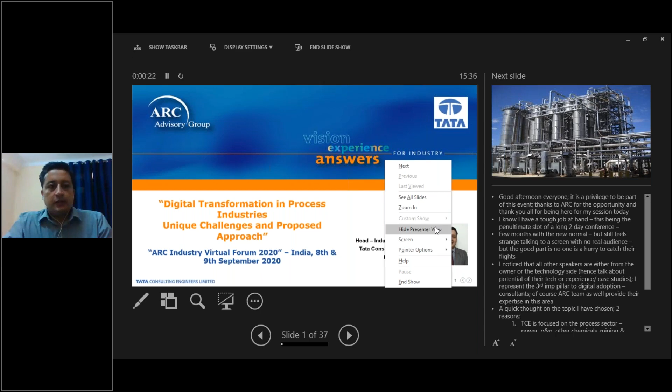I know I have a slightly tough ask, this being the penultimate session of a long 2-day conference, and I'll try my best to make it interesting and request for your patience.

One of the things I noted was that all the other speakers here, apart from the gentleman from ARC, were either from the owner side or from the technology firm, which makes a lot of sense. Owners are going through the digital transformation journey, and technology firms are providing them the tools to reach there. But I believe I represent the third key pillar in this digital transformation, which is the consulting side of it, and I think they have a very strong role to play. Happy to represent that pillar, and of course the ARC team also provides their valuable expertise in this area.

A quick thought on why I have chosen this particular topic. The first reason is simple: TCE does a lot of work in the process domain. We do a lot of work for power plants, oil and gas, petrochemicals, downstream and other chemicals, for metals and mining. We also work in the infrastructure domain, but the bulk of our work is in the process industries, so we have a good understanding of what happens there.

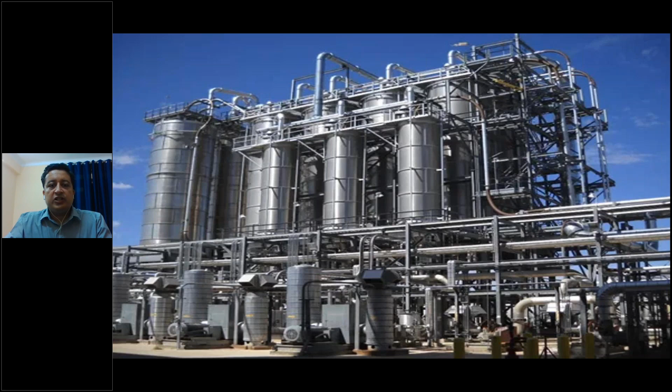With that, let's look at some of these unique aspects, which I've tried to list based on my understanding and discussions both within and outside our organization. The first thing I feel is very unique about a process industry or process plant is the immense complexity. There are diverse equipment, control schemes, operating procedures, so many PFDs and P&IDs coming together, and complex instrumentation.

A process plant with medium complexity may have as many as 50 P&IDs that coexist together. Some plants with more complexity may have as many as 150 to 200 such P&IDs, all interlinked, which come together. And to understand them, of course, needs a lot of context, as I spoke earlier.

The other thing which is key is that most of these process plants are bespoke. They are unique, in terms of maybe some of the components being common, but when it comes to the entire configuration, they are unique, and very few two process plants will have a similar set of equipment or similar configuration. So that's one of the key things I believe is unique about this process industry.

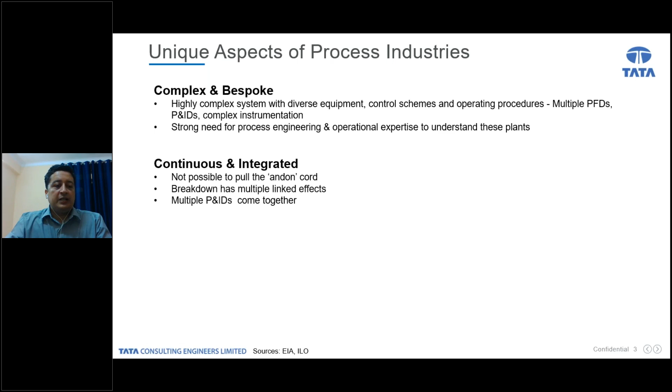But here there are multiple effects, not just in terms of inventory getting wasted, but also related effects on the asset health of the different components. Because the plant is integrated and all these P&IDs are interlinked, stopping the plant can lead to changes in process parameters, which could have a damaging effect on the equipment and the plant altogether, affecting asset life as well.

The third key area is energy intensity. According to EIA estimates, the industrial sector overall accounts for around 54% of the world's total energy consumption. But when it comes to process industry, I was surprised to note that 75% of that comes from process industry, excluding discrete manufacturing, logistics, and other industries producing an equal GDP amount. Process industries are unique in their extremely high energy intensity, and I want to bring in an example of aluminium smelter.

For one of our clients, we were doing a study related to aluminium smelters. During the aluminium smelting process, in the pot line, the amount of energy consumption is immense, and that is one of the main cost drivers in the production cost of aluminium. So that's the level of energy that is spent.

There's a related point when you talk about energy. Similar to energy, when you talk about water consumption, or emissions that are released, the same principle applies - they are very intensive in water consumption, other resources, and emissions. That's one characteristic separating process industries from discrete manufacturing or supply chain, which are relatively cleaner. Their energy costs are limited to the electricity required to run machines and overall plant lighting.

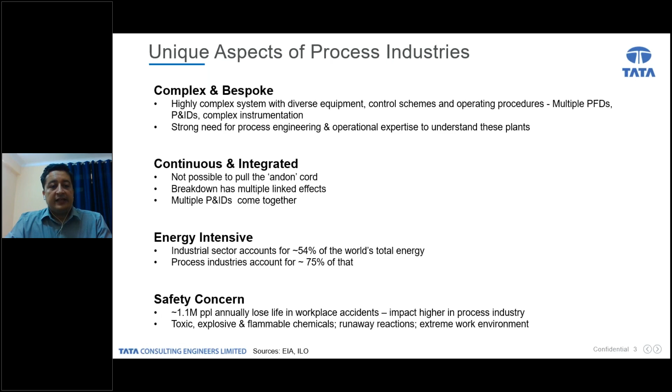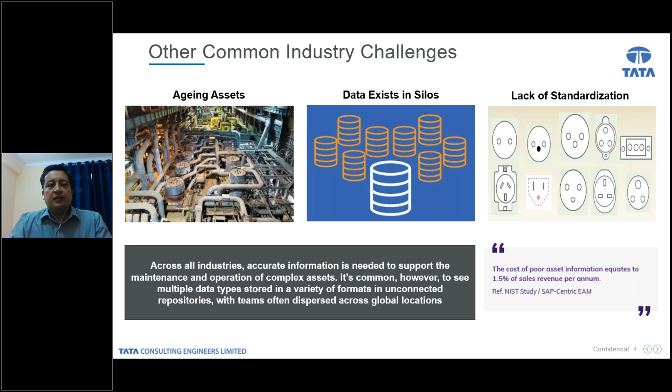So those were certain things more specific to the process industry. But apart from that, there are of course other industry challenges such as aging assets, a lot of data existing in silos, and lack of standardization. These are common across the industry, and I'm sure a lot of my earlier speakers must have spoken about this, so I'm not going to dwell too much on that. What I wanted to say is that these other industry challenges additionally apply here as well.

So having looked at the unique aspects or nature of process industry, let's now come to how this impacts digital transformation in the process sector.

So we spoke about these complex bespoke assets, and for bespoke assets you need bespoke solutions. I want to explain that by saying that even the imperatives right from the beginning, and I'm not even going into the details of the solutions required, but even the reasons why the solutions have to be implemented are unique in the process industry. In most other industries, the prime driver of any initiative, including digital, would be productivity. But in process industry, productivity is important, and driving shareholder returns is one of the top priorities, but along with that there are three other factors - reliability, safety, and energy efficiency - which are almost as important or sometimes even more important than productivity, given the nature of a particular business or the priorities of a particular client.

So I would like to briefly cover these three. Reliability - don't get me wrong, I'm not saying reliability is only used in process industry. We have umpteen examples of reliability being used in the discrete sector, and in fact the origin of reliability happens to be in aerospace, although there it was applied to the aircraft itself, not the aircraft manufacturing process. So that's the subtle distinction. In that sense, if you look at an aircraft, it is in a sense like a process plant - a very complex equipment operating in a very typical condition, where failure is not an option. Failure means so many people dying because of a plane crash.

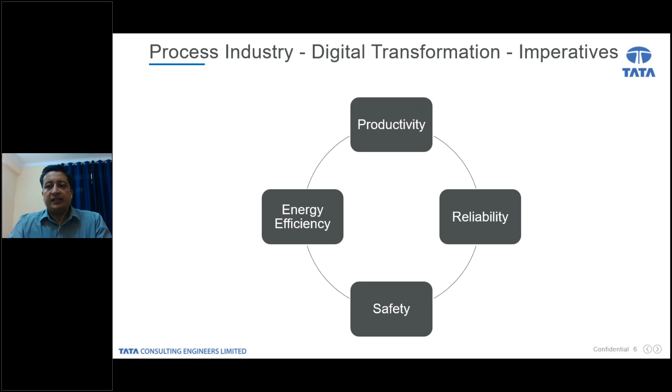So that's the way these solutions - because the imperatives themselves are unique - the design of these solutions has to be thought very differently. We cannot just take solutions implemented in other industries and implement them in an out-of-the-box manner. We need a structured process to conceptualize solutions tailor-made to the process industry and implement them.

Coming back to the impacts, the second key impact I want to talk about is the need for a comprehensive approach towards digital transformation in process industry. And there are two key points I want to drive here.

The first one is this whole concept of digitization and digitalization. I understand there are many ways in which it is used, and different people have different understanding. But broadly, what I believe is digitization is essentially just converting your information, which is probably currently in a physical form, into a digital form. This could be digital sensors, digital engineering, or any other documents or data available in a plant. So simply converting it into digital media is what digitization is.

And on the other end is digitalization, which is essentially using that digital information that is available in order to do multiple things - to create visualization, to use for productivity optimization, for asset performance management, or for digital workforce. Essentially, using that data in umpteen number of ways in order to get several benefits out of it. So any form of app development or solution development using that data is digitalization.

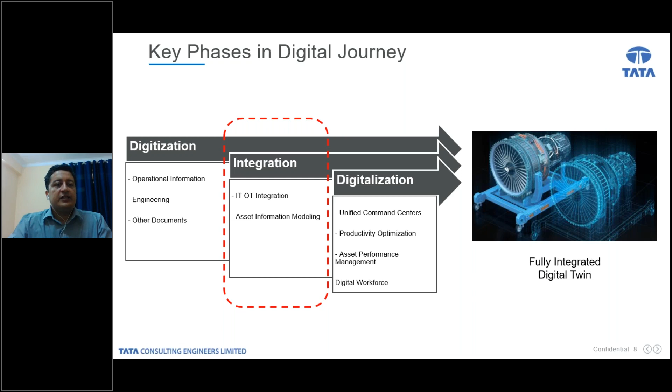So I want to quickly move to the next slide to explain that a little bit more. This is where I want to share our conceptual framework of a digital twin that we have for our clients, that we share with our clients.

Essentially, it has to start with first merging the OT and IT silos, creating a platform where OT and IT data can seamlessly talk. Currently you have an ERP system and a DCS or SCADA system, which are practically standalone with very limited exchange of information, and a lot of times that exchange is also a quasi-manual process. It's high time to bring all this data to a platform level so they can start talking to each other.

But more importantly, in the context of process industry, the third element, ET - engineering technology, which not a lot of people talk about - needs to be brought into this data lake. And this is very important.

Again, our assets are very complex. Even if you develop a very nice application which tells you predictive analytics or gives you insights about a particular equipment, if you're not able to visualize it in the right way - and this becomes extremely important when we consider the new age workforce coming into our organizations.

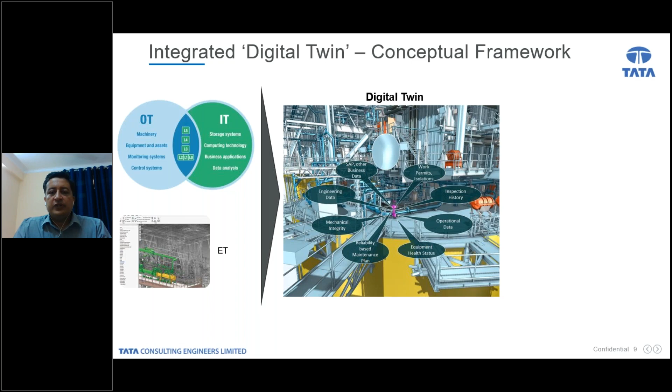This framework, which we call asset information modeling, becomes the substrate which can be used for powerful visualizations and then building all subsequent solutions on top of it. So if you see on the left hand side, on the right hand side, now on this substrate, you can go ahead and build whatever application you want to build.

It could be visualization applications, command control centers. It could be APM related applications. It could be productivity, simulations that you could drive, or it could be very useful and light digital workforce applications which help your workforce in managing their work on a day-to-day basis, be it operator rounds or maintenance rounds, and essentially get both quick access to the data that they need and also be able to upload the data.

And again, that goes and sits with reference to that particular pump or a valve that we are talking about. So essentially, our vision is that progressively process industries will move towards creation of such integrated digital twins where OT, IT, and ET will all come together and give the holistic picture.

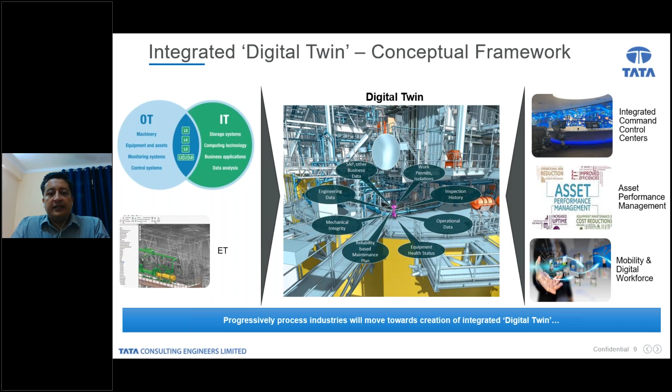You may say that, well, this is a good concept—how do we go about it? Just to quickly share with you, we have also worked through the detailed solution architecture of how some of these things would work, and I am just quickly sharing some of these things with you. You must be aware of it at a conceptual level.

At a data layer, there are different sources of data. But what we are proposing is that the ET data or the plant digital data should come in, and that should form the fundamental substrate of the digital twin on which we can build all forms of analytics, be it APM or other applications, AR, VR, simulation, process optimization, everything. And then finally comes the visualization layer. So this is more from a technical or solution architecture perspective, if you're interested in that.

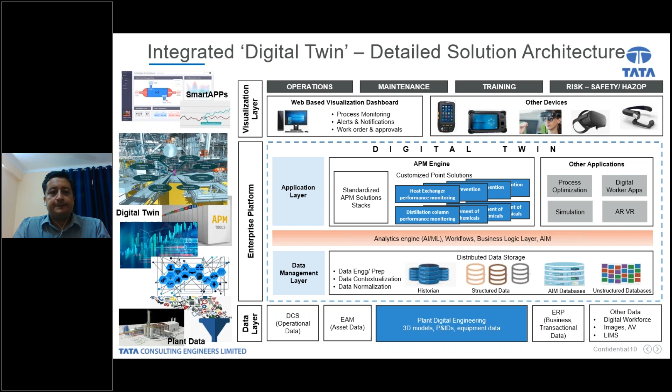Coming back to our earlier slide on impacts on digital transformation, the third point here is very critical, which is the importance of domain expertise.

There are two key things here. One, of course, we're talking about digital implementation for very complex engineering assets, and therefore, unlike in other industries where it is more related to simply the productivity or related KPIs or business process, here the applications have to be deeply embedded in the asset.

A clear example is any APM, asset performance related applications, be it predictive or reliability. Unless I know how the particular asset works, what are the failure modes, what are the different mechanisms with which it can fail, what is the effect or outcome of that failure, how critical it is, can I do the criticality analysis of that failure, and most importantly, what are the probable root causes of that particular failure.

Now, these are all very technical topics, so to speak, and unless you have that understanding of the asset and the ability to do these things, implementation of digital will only be superficial. So therefore, domain expertise is extremely important.

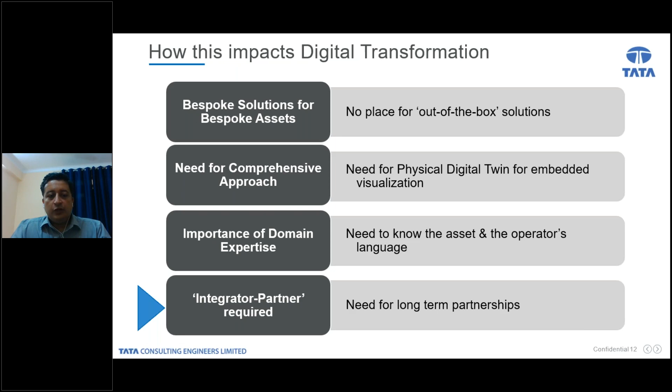And with that, I come to the last point of my section on impacts, which is the integrator partner required. What I want to say is that there is a need for long-term partnerships in process industries. The approach where someone makes a master plan or roadmap and then walks away does not work. It has to be an end-to-end relationship where your implementation partner has the comprehensive solution approach and the right domain expertise, with the ability to walk you through the entire way.

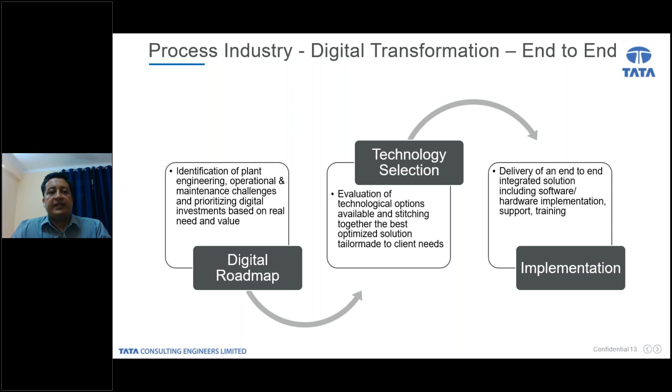An end-to-end solution starts from identifying the engineering and operational challenges, prioritizing the digital investments to create a digital roadmap, and then evaluating them. Many technological options are available today, and stitching together the right solution tailor-made to your requirements is very important. Finally, implementation and delivery of an end-to-end solution, hand-holding you through the entire process, is key. This end-to-end approach is important, and that's where TCE comes in.

In our digital services, we essentially leverage our domain expertise across the different sectors we exist in, be it power, resources, or infrastructure. So far we focused more on the project creation or asset creation lifecycle, but over the last decade or so, we've taken that core domain expertise and started using it in the plant operations lifecycle, working with a large number of technology players. They are a very important part of the puzzle in creating these bespoke, end-to-end solutions for our clients.

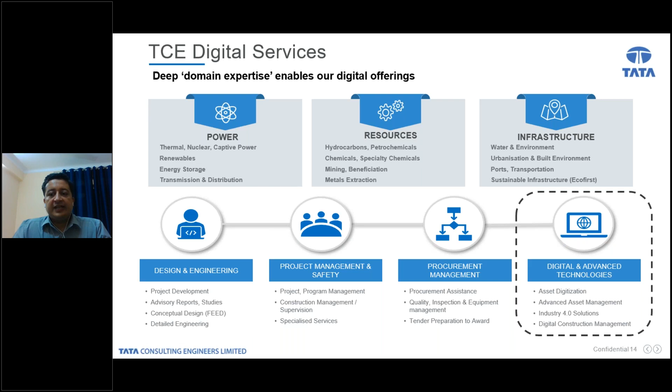I want to take the last few minutes I have to walk through some of these case studies, some of these interesting solutions that we have delivered for our clients.

For this refinery, as I was explaining earlier, what we're using is a very interesting latest technology called laser scanning, where we are able to scan an existing plant and convert it into a 3D model, like you would design from scratch in the case of a greenfield.

Using these techniques, what we've done is not only create 3D models, but also capture the different information existing in the plant, be it engineering P&IDs, smart P&IDs, or the various unstructured data in the form of PDFs and manuals that exist.

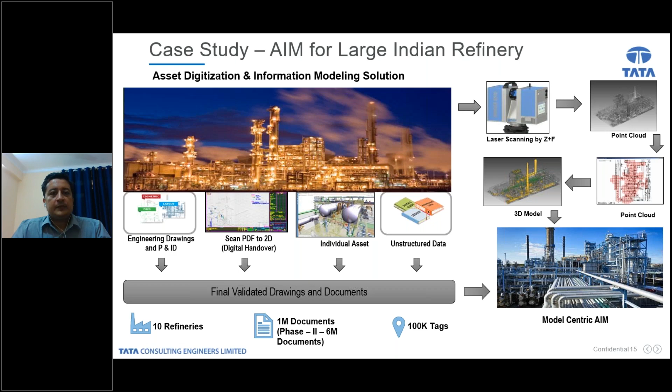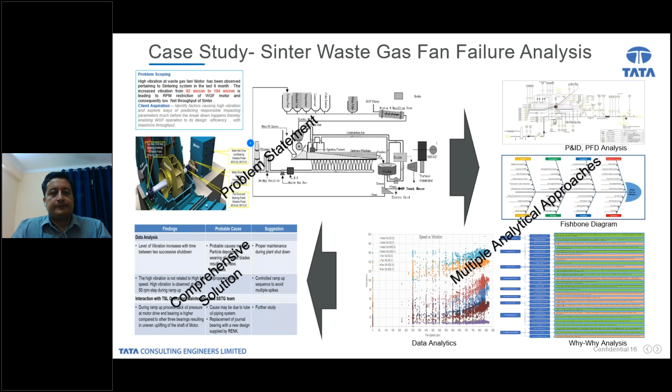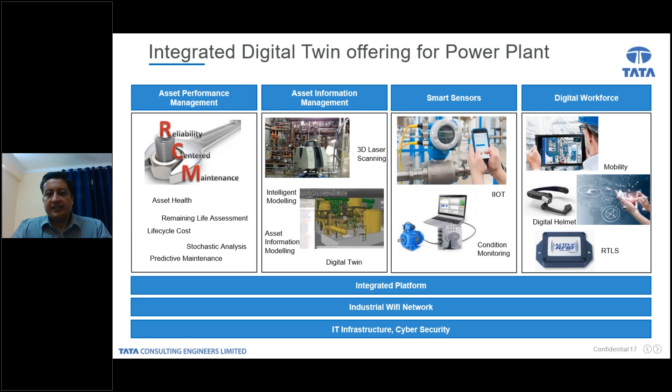This, I think, was a great milestone for us because this is exactly what I'm talking about - both the comprehensive nature of this requirement and our ability to use our domain expertise and understand the client requirement came through. This is something we are now offering to most other power utilities, and this is a solution that can be tweaked for most process industries.